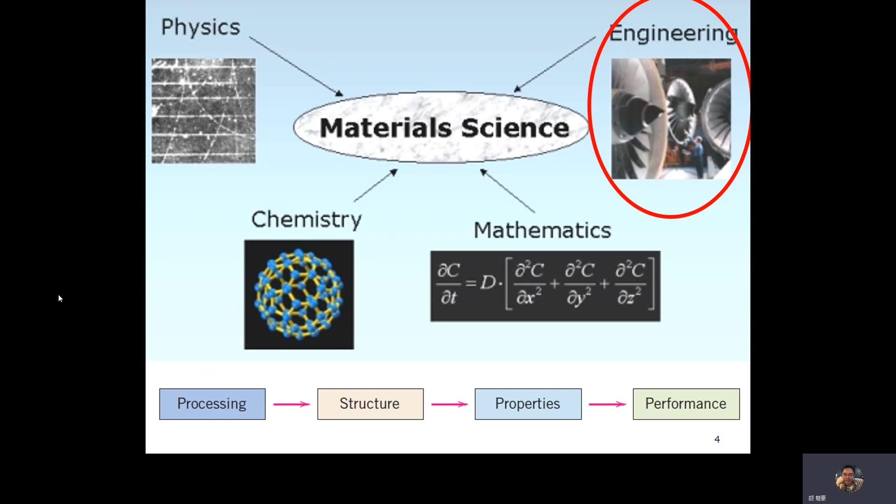So let's give you some general ideas of materials—those materials that you can observe every day. For example, the most commonly seen every day are metals and metallic alloys. What are their properties? Metal is shiny, electrically and thermally conductive, and ductile compared with ceramics. So if a material has these properties, you know it's probably metal. Think about the function of those properties.

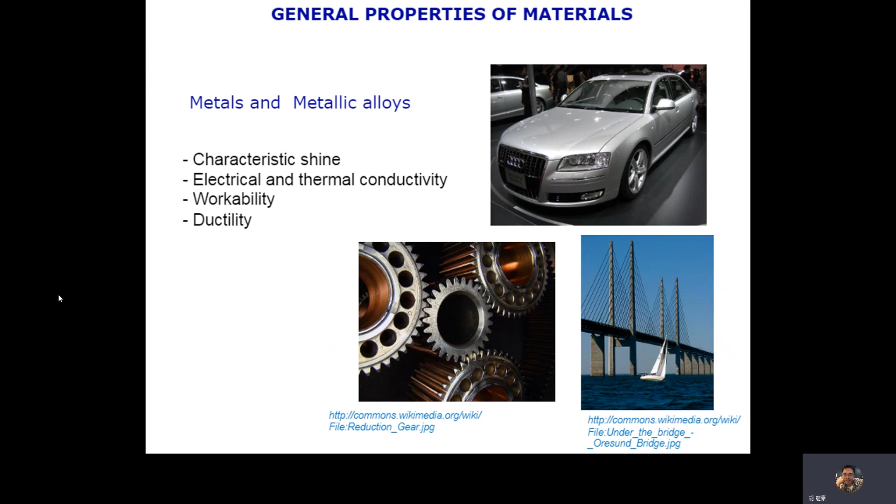The second material is polymer. So what is polymer? In other words, polymers are just plastics. Think about the function and application of plastics. Principally, polymers are based on chains of carbon atoms joined by covalent bonds, which we'll introduce later.

There are different types of polymers. Basically they can be classified into three types: the first is thermoplastic, the second is thermostable or thermoset polymers, and the third is elastomer.

So what is thermoplastic? I don't know whether you guys have used 3D printing—additive manufacturing. The 3D printing technique is based on thermoplastics. We have raw materials like PLA wire or ABS filament, and so on.

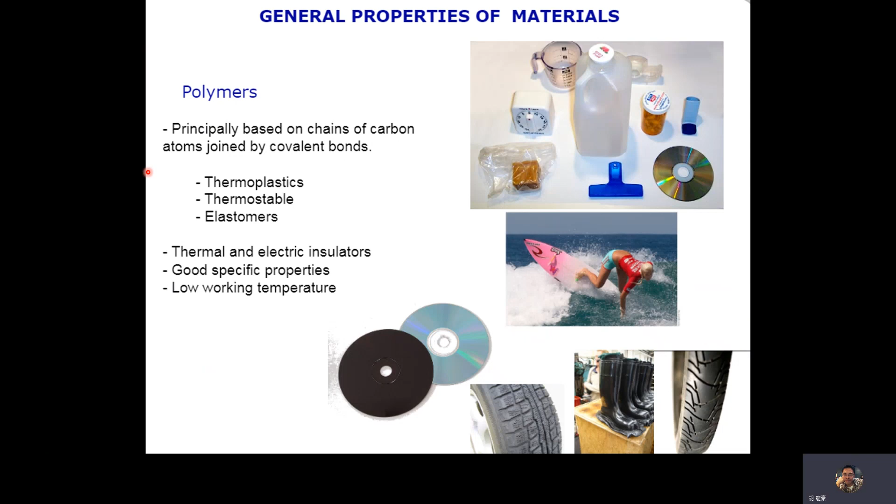So next is ceramics. What is ceramics? What's your stereotype of ceramics? High hardness, very brittle, and it's an insulator, with very good chemical stability.

So if you want to build up very hot parts with high strength, and you also need the parts to resist corrosion, to be stable in strong acid or strong base, well, you can think of ceramics as a good choice. And also it's thermostable. It's very thermostable, materials can reach like 1,000 or 2,000 Celsius. That's why you can see spacecraft, and some turbines use ceramic coating and so on.

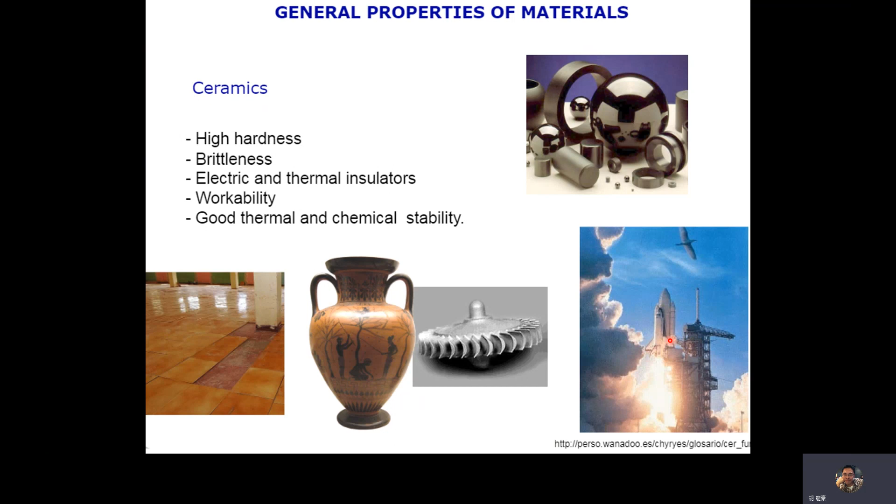So let's introduce a different type of material called composite materials. What is a composite? It's a mixing material, an artificial material. Basically it's a composite of at least two materials, and its property depends on the constituting materials.

So what are these two materials? One is the matrix, and the other one is called the filler, F-I-L-L-E-R. We mix these two types of materials to reach certain mechanical properties or chemical properties and so on. Basically the matrix usually can be epoxy, and the fillers can be ceramics, metal, polymer, fiber, carbon fiber, glass fiber, and so on.

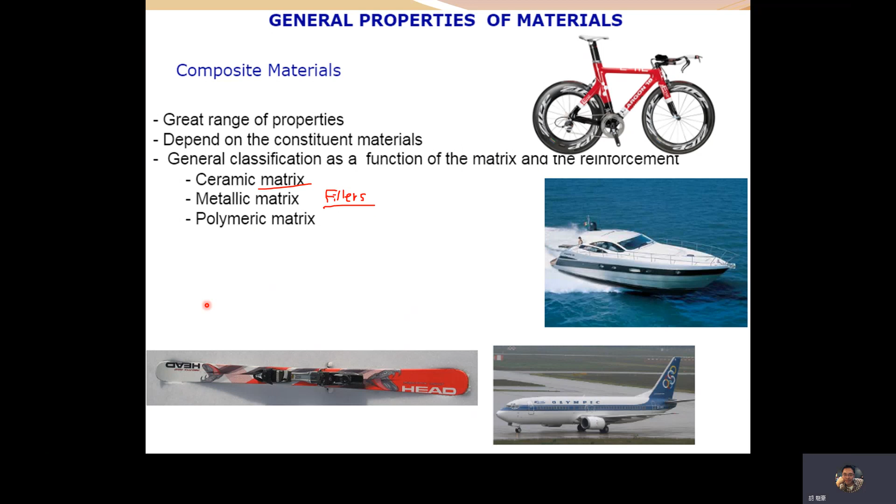So I'll give you some other examples of material science applications. For example, what's this? It's the joint, the hip joint. So when you're getting old, some parts of the human body are going to decay, for example, the joint, the hip joint.

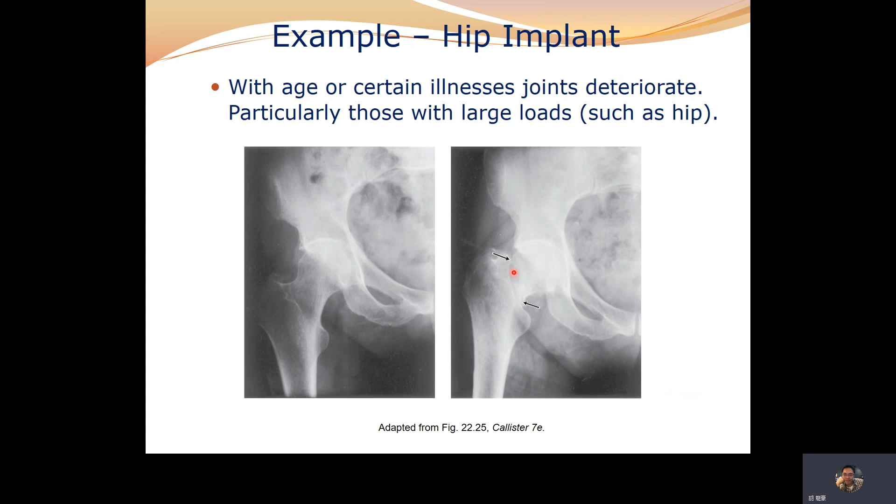So if we want to replace it, what's the material's properties that have to be specified for hip implant? Of course, we need mechanical strength, because this head has to support the whole human body, so it has to be mechanically strong. And it needs good lubricity, because this head is going to be rotated and twisted every day.

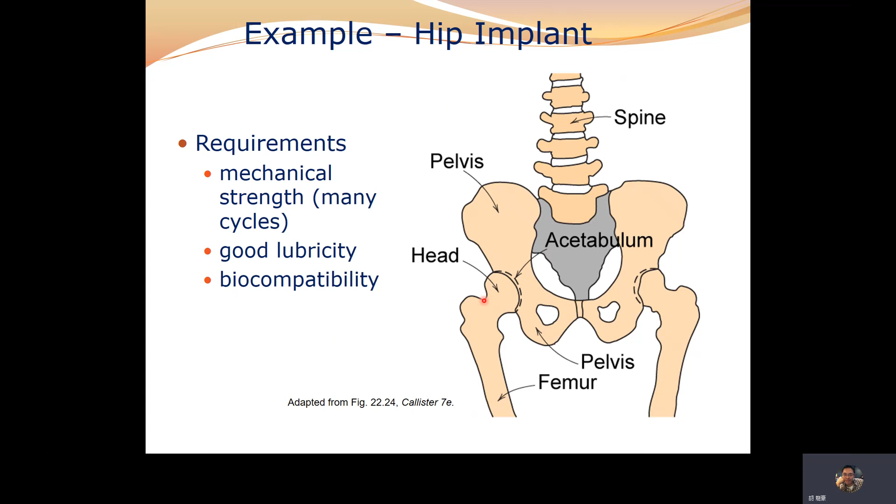Of course, it must be biocompatible. You cannot implant something which is not biocompatible. Once you implant this kind of artificial joint, it will remain in the human body for 10, 15, 20 years. So you have to think of a lot of requirements. It's not easy. That's the job of the materials science engineer.

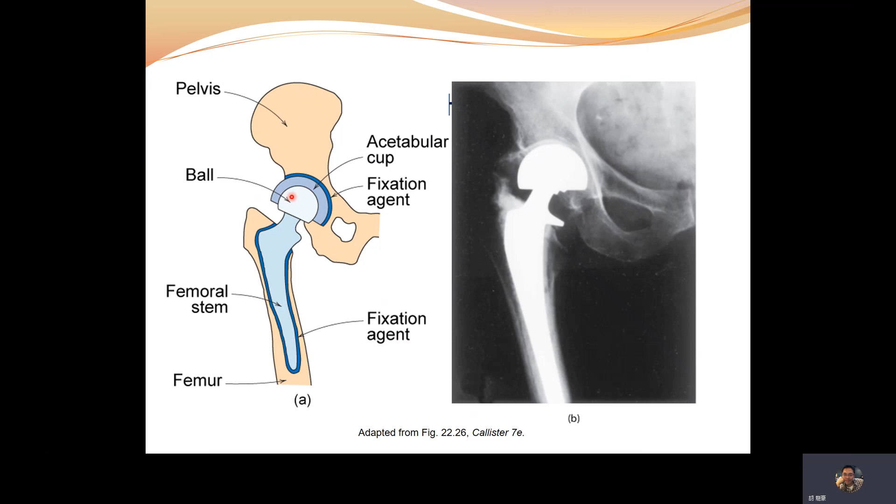So this is the artificial hip joint. We have the head, and this is called the femoral stem. We have the cup, sorry, this is the liner, and this is the cup. This part usually is plastic, polyethylene, though you can change it to something else like ceramics. So we have the cup, the liner, the head, the stem — four parts, different types of materials. So how do you select materials for each of these four parts? It's not easy.

For example, the connection between the liner and the head: when you keep moving, during some sports, it might create some debris between these parts. Those debris may be very fine polymer particles. So whether those particles influence the human body is something we have to be concerned about.

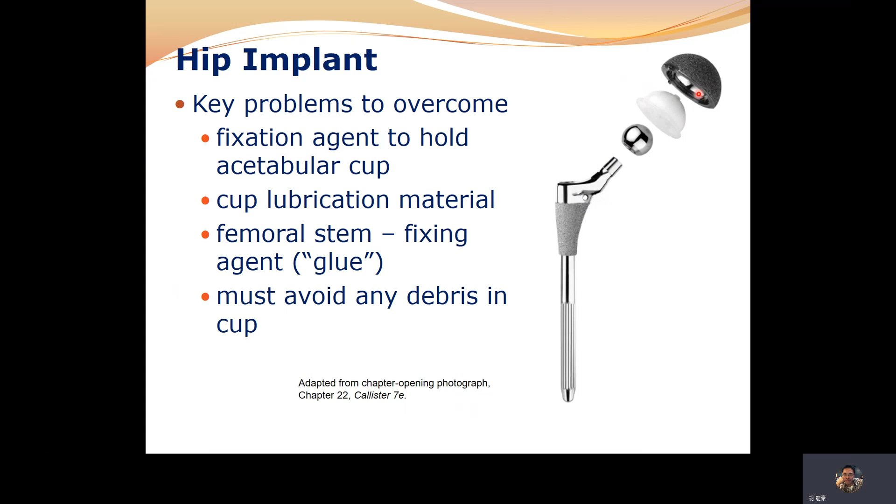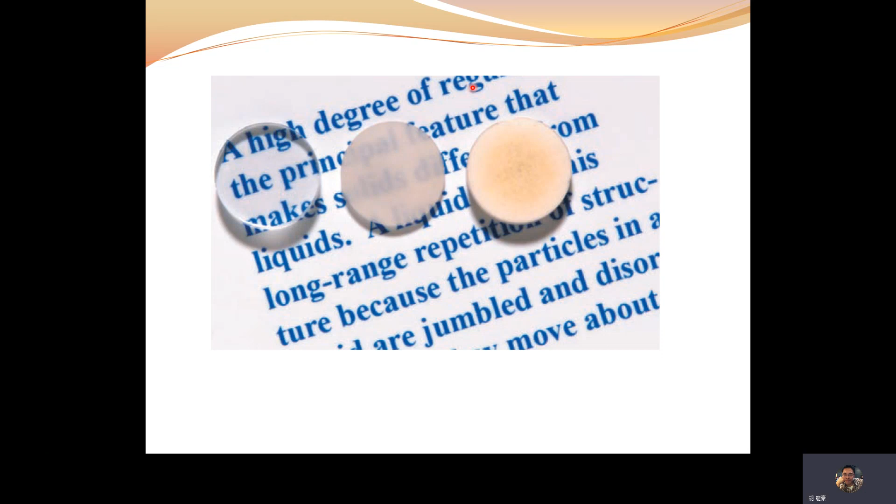This is another material property, such as optical property. These three are alumina, aluminum oxide. You can see their transparency is different. So we can adjust its composition to modify its transmittance. That's another material property — optical property.

So material science is an interdisciplinary field concerned with inventing new materials and devices and improving existing materials by better understanding microstructure, composition, synthesis, process relations.

Okay, so there are some terms we can focus on. The first is called composition. When we have to synthesize new materials, we have to realize the composition. Well, we are not chemists, we are material science engineers. So we don't have to focus on the chemical reaction because we are not chemists. The chemistry is quite tough for us, but we have to know chemistry. We know how to use it.

So what do we have to focus on? What the material science engineer has to focus on is the structure, synthesis, and the process. We have to arrange the atomic structure. Different structures have different properties. We have to fully realize that. And synthesis and processing is the crucial issue for us, for material science engineers.

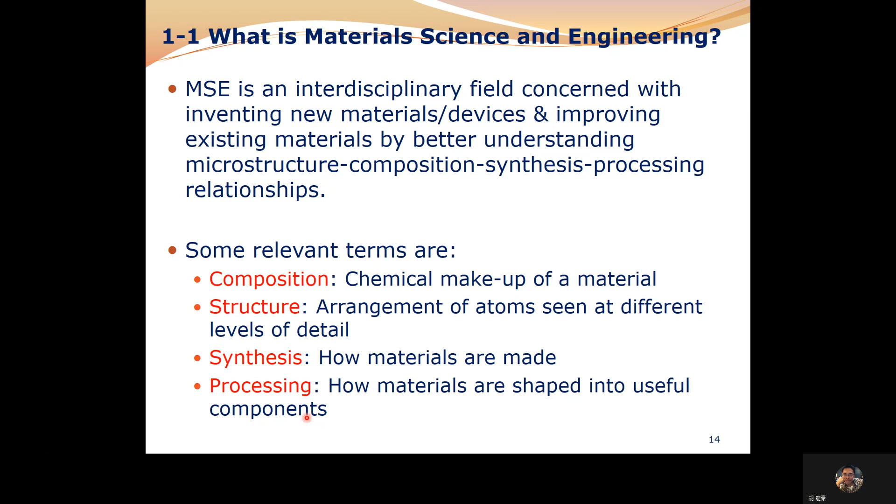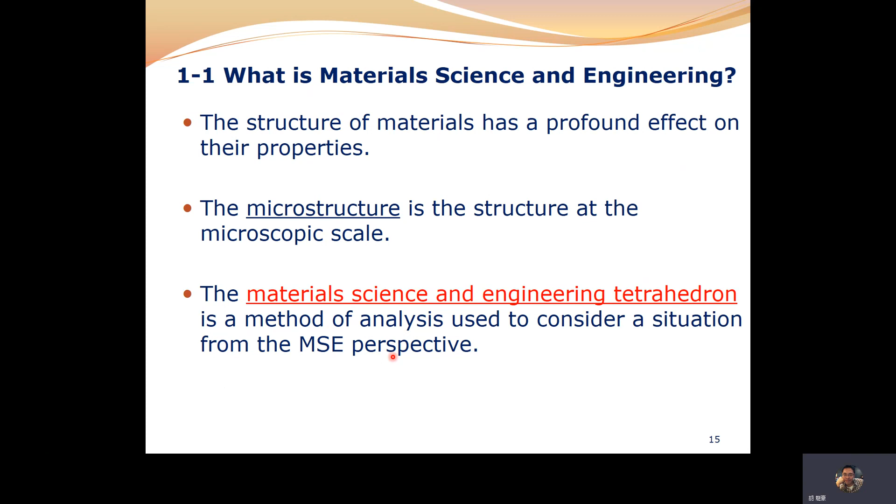So the structure of materials has a profound effect on their properties. Basically, from the mechanical point of view, the microstructure is what we have to focus on, macro and nano. So there's a tetrahedron, which is a method of analysis used to consider a situation from a material science engineering perspective.

So let's see the tetrahedron. We mentioned before that there are four terms we have to be concerned with: composition, synthesis, process, and structure.

First let's think of composition. For example, your boss asks you to develop a new material that has to achieve some specific strength. At this moment, you think about what materials should be used for the matrix. For example, you're going to make a composite material, and what kind of material should be used as the reinforced phase, as a filler, and what's the volume fraction between these two? After you decide this, what's the microstructure that results?

What does that mean? Maybe the carbon fiber or glass fiber is not oriented, it's random, or the carbon fiber is aligned. So its direction is highly affected—I mean, the mechanical property is highly affected by the orientation of those fillers or reinforcing phases.

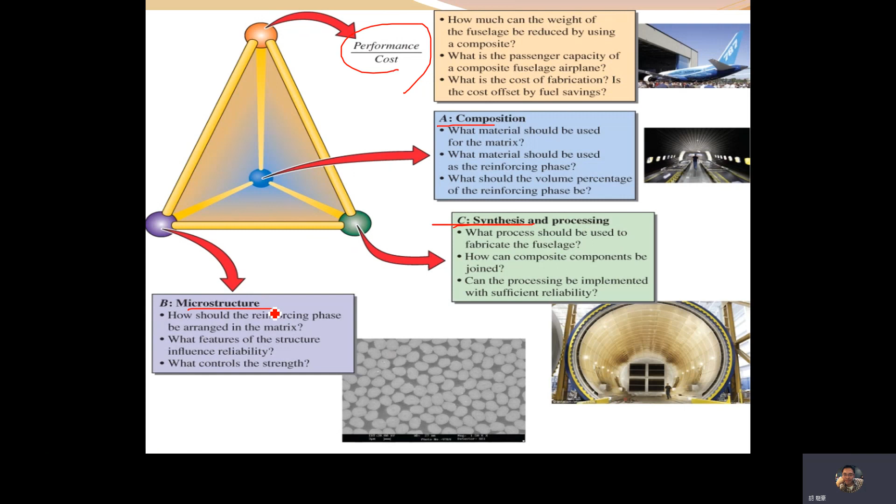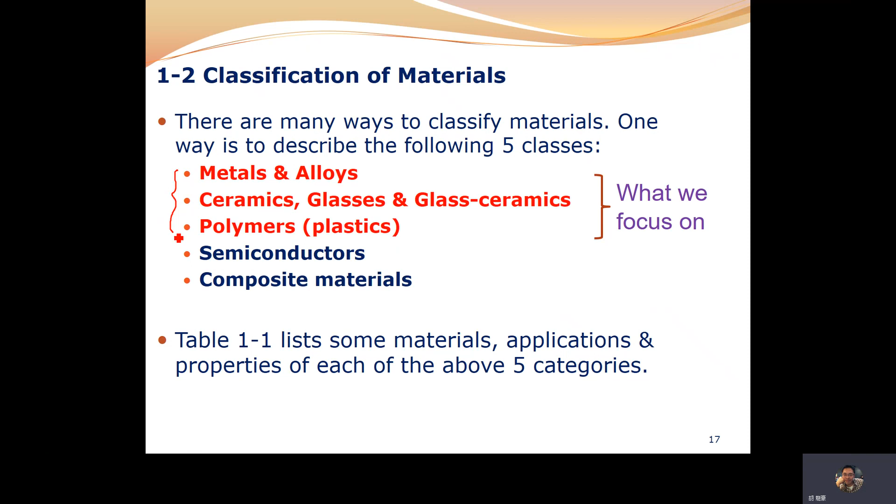So for this course, depending on our time, we're basically going to focus on three materials: metals, ceramics, and polymers, which we can observe every day. Even if you haven't studied material science, haven't studied this course, you still have some ideas, some perspective on these materials.

If you want to develop a new component or mechanical part and you need to reduce the weight, for example some racing cars, right? Maybe made of composite, right?

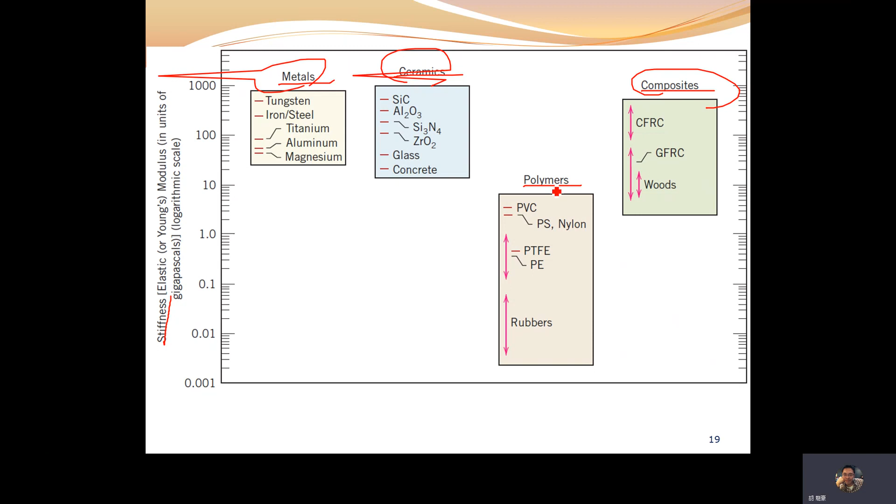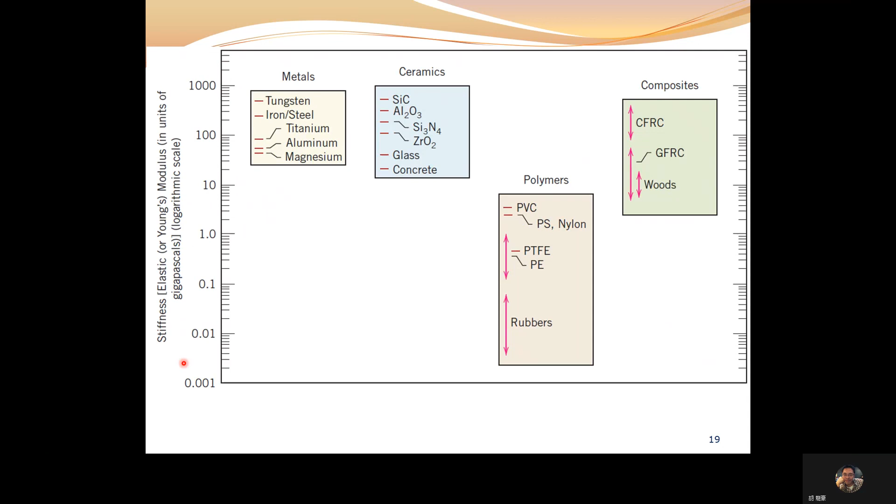So what can we get from this figure? For these three, metals, ceramics, and composite, their stiffness are quite similar, compared with the polymer, right? Their hardness or stiffness are quite similar. However, if we compare with the previous figure, if you want very high hardness, high stiffness, and light weight, we have to choose composite.

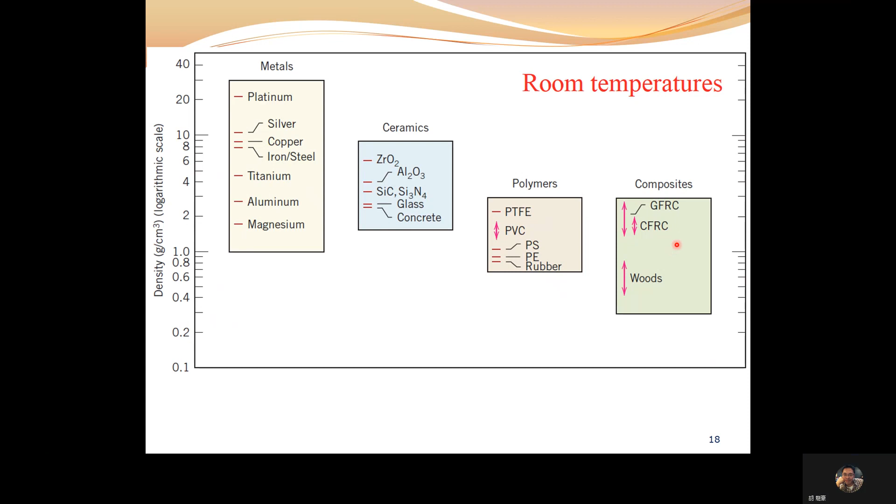And then it's the strength, mechanical strength by tensile test. I will introduce this later, but for now just realize it's the strength, how strong the material is. So what you can observe, the metal strength is similar to composite. However, composite has the lowest density. So if you want strength similar to metal but need very light weight, we can select composite.

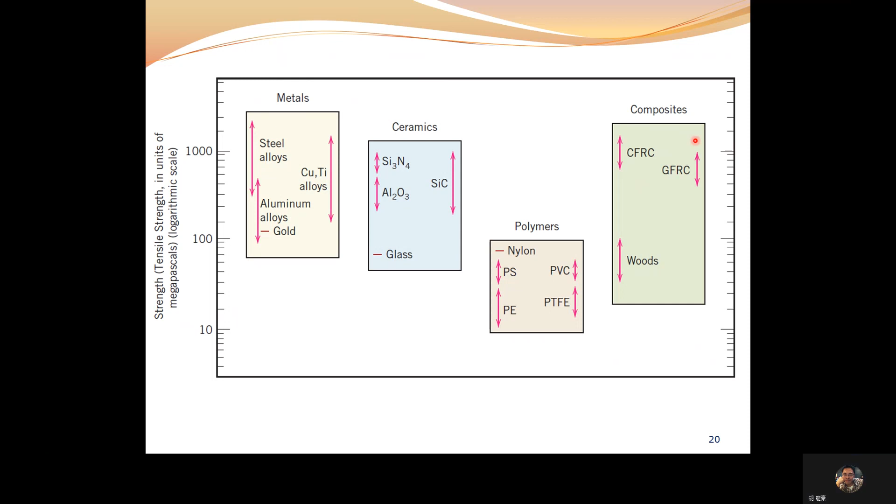What's this tell us? It's electrical conductivity. If you want to build up a component or part which is an insulator, the requirement is the part has to be insulated. So we have to choose ceramics and polymer, right? We cannot choose metals and semiconductor. So you have to fully realize what your product's properties or product specs are.

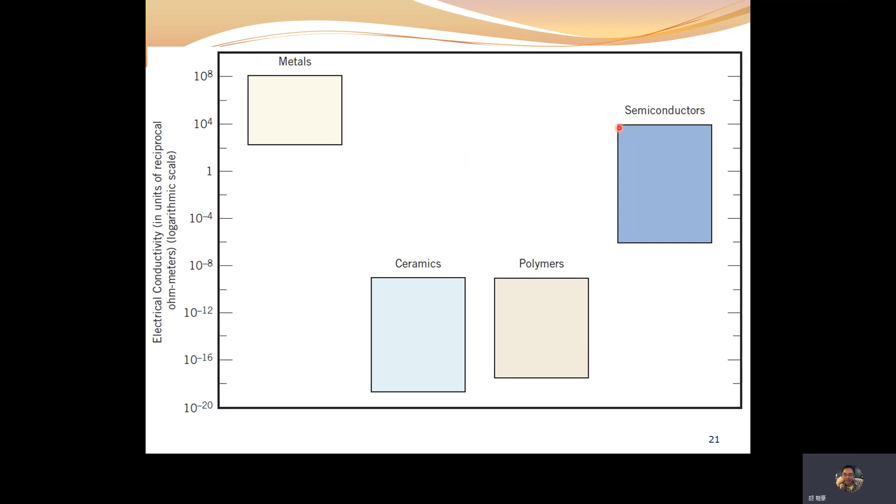So materials in each group have their properties. We are also interested in load-bearing mechanical properties of the materials from our mechanical point of view. Okay, so next we're going to look at some terms, some terminologies of the mechanical properties.

The stress. What's the meaning of stress? It's the load or force per unit area, right? That's the force divided by area. So what is strain? Remember, I mentioned the elastomer, which has very huge strain - it can sustain huge strain. What does that mean? It means the elongation, or change in dimension, divided by the original dimension.

Okay, and strain is caused by stress. So if strain goes away after stress is removed, it's elastic. Otherwise, it's called plastic. So what does this mean?

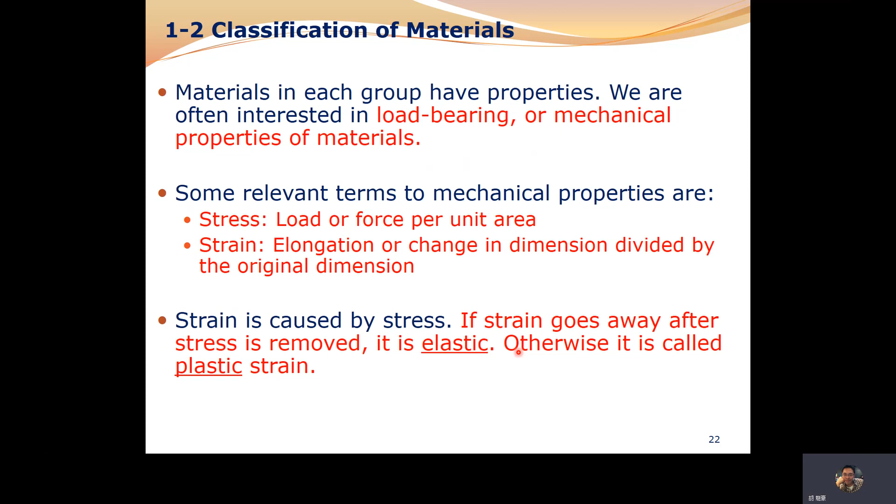So you can look at this figure. It's called the classification of functional materials. So you have to think, we use some components in the biomedical industry, or in electronics, or in aerospace structures and optical materials. Different applications have specific properties you have to think of. That's why I mentioned in the very beginning, material science is very complicated. It's not easy.

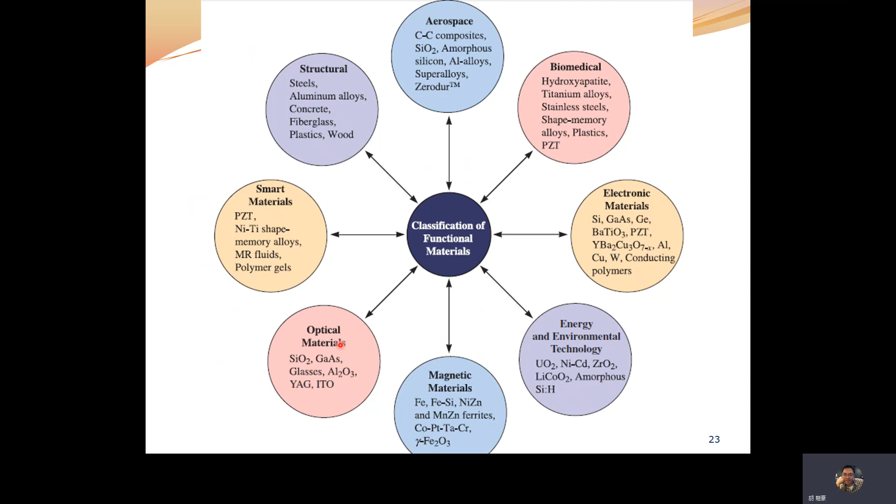Okay, so let's focus on the structure. If we look into materials, which are built up by atoms, by atom arrangement - how to arrange those atoms, how to realize which atomic arrangement has what kind of mechanical property or what kind of electric property.

So we have to realize these two classifications of atomic structure. First is called crystalline, the second is called amorphous. Crystalline means atoms arranged in a periodic fashion. Also, crystalline materials classify into single or polycrystalline. Single crystalline has crystalline materials consisting of a single crystal, and polycrystalline has crystalline materials consisting of multiple crystals or grains. I will talk about this later, but let me give you a very basic concept.

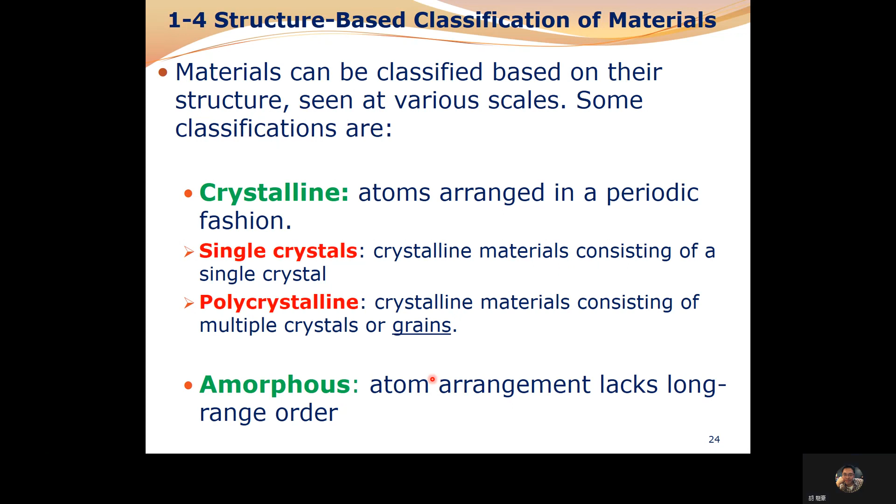Let's see this. So long-range order is similar to a periodic fashion. We have units arranged in periodic fashion. However, short-range order means we have short units arranged randomly. Let's look: the first one is the crystalline structure, where atoms are arranged periodically. The second one is called polycrystalline, partially crystalline. This part is crystalline, and this part, and this part. So we have 3 grains, 1, 2, 3.

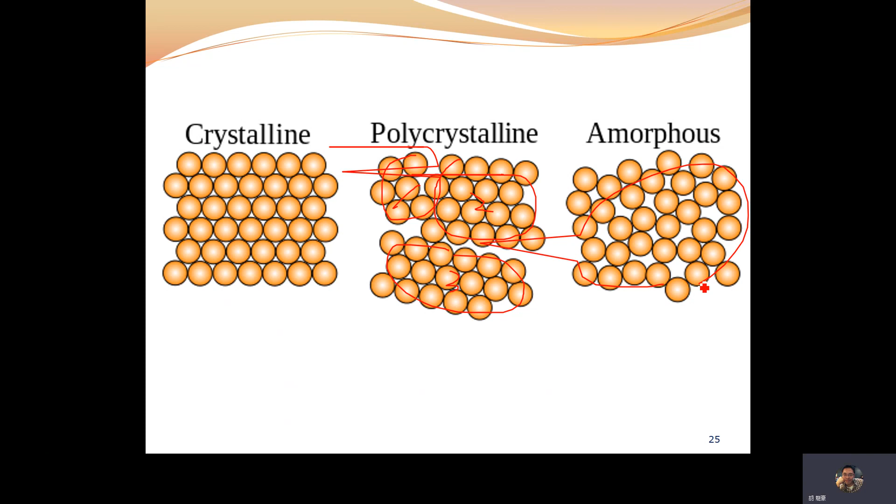And the third is amorphous. There's no structure that can be observed. It's random, okay, it's random.

Okay, so let's look at environmental and other effects. The structure-property relation in materials fabricated into components is often influenced by the surroundings - that's the environmental issue. What are those issues? For example, temperature, corrosion, fatigue, or strain rate.

For example, you're gonna build a submarine, or you're gonna build a ship, right? A submarine is always under sea level, over years or months. So what are the properties of its shell, the submarine shell? What are the environmental conditions for the submarine shell? Maybe it's gonna...

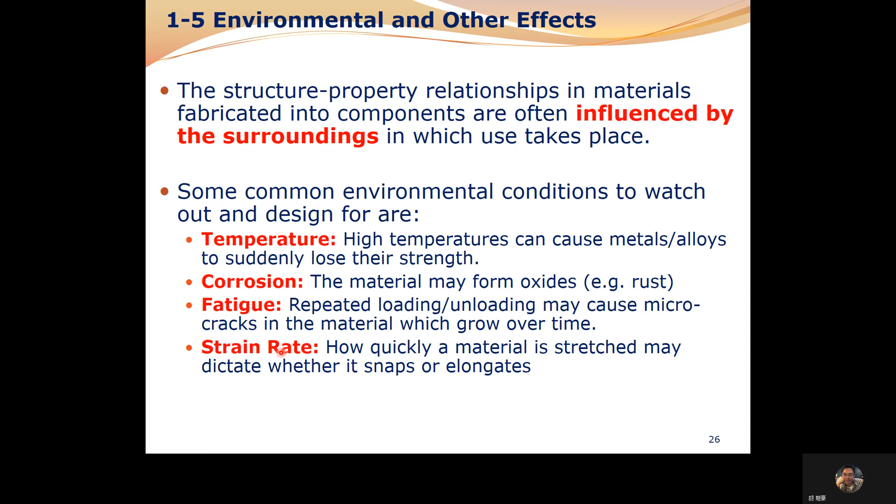Okay, so there's an air crash. We have to think of what's the reason - what kind of reason caused the air crash? You can think of it. What are the main issues that caused this air crash? Maybe it must be something wrong. You can think of it and list some possible reasons, and then we can discuss later.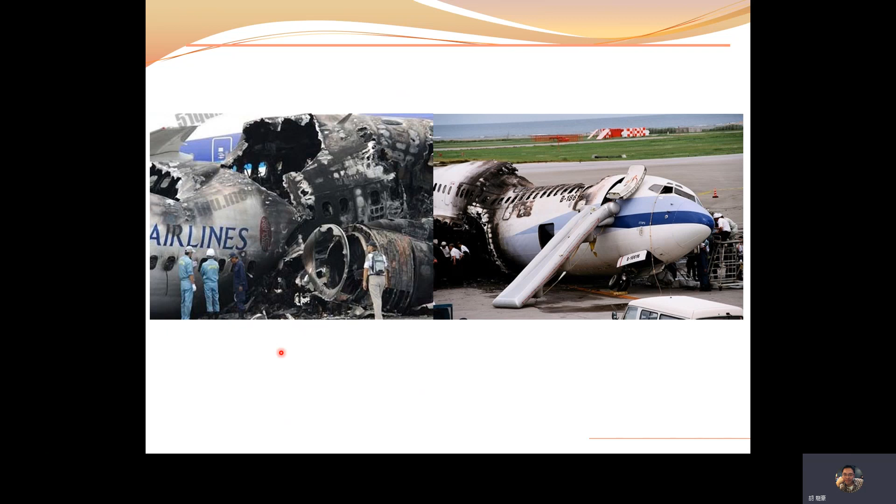So from a design and selection point of view, a number of factors must be considered when you design and select materials for an application, as I've mentioned before. So some basic engineering considerations you have to focus on - for example, what is the mechanical and physical property?

It must be capable of being processed or manufactured into the designed shape. You have to make a shape, not just have some material - you have to process the material into a shape. And it must be economical for the application. What does this mean? That means the cost.

In recent years, the environmental issue has become quite important, so you have to think about the materials you use. It has to be recycled or it can be reused - that's the best choice. So it must be environmentally friendly.